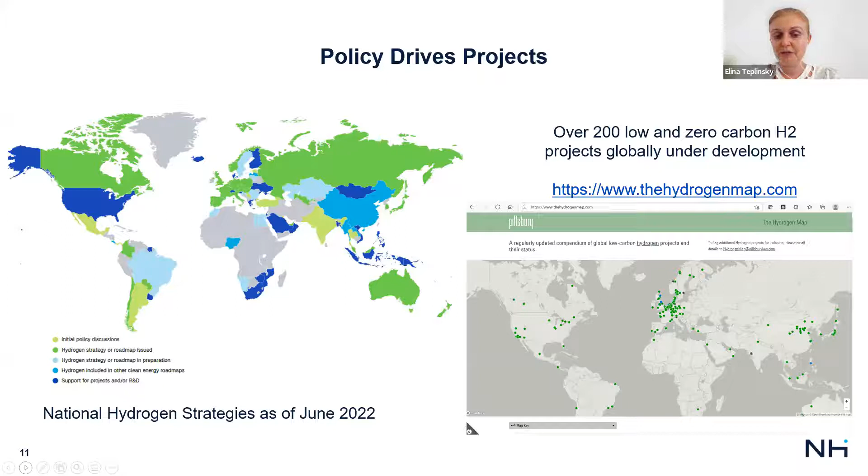From this, we take a look at the jurisdictions that have some form of support, and we take a look at which ones have either explicitly or implicitly included nuclear hydrogen production. It is not all of them, but it is quite a few countries. They have recognized the value of nuclear in producing hydrogen and zero carbon fuels more broadly. And most of these jurisdictions have explicitly included nuclear in their hydrogen strategies. In some of them, you've had nuclear hydrogen production projects and pilots outside of the strategy, despite not having an all-government focused strategy.

And those would be projects in China and Brazil, which both have pilots. In China, there's more focus on advanced reactors, small modular reactors, high temperature hydrogen production. In Brazil, you actually have a project for the production of hydrogen at the Angra nuclear power plant, which is happening today and has happened for quite a long time. But now there's an effort to commercialize that hydrogen.

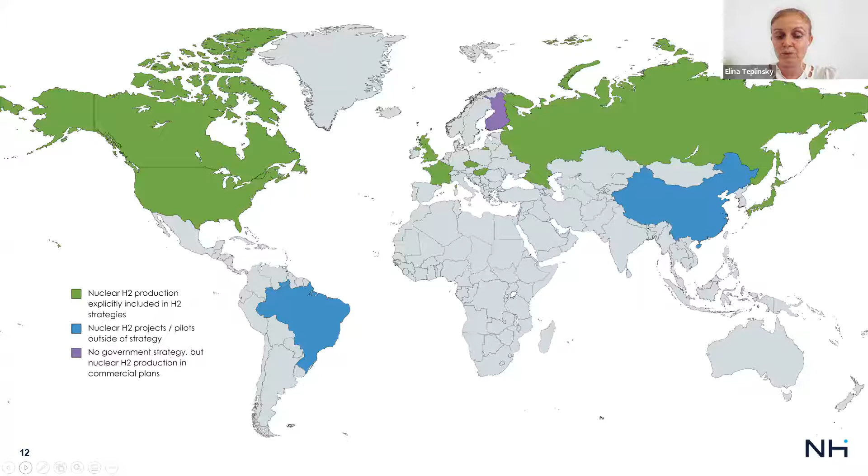And you have an example of Finland, where there is no government strategy, but there is nuclear hydrogen production in commercial plans. But you see that those are the outliers, the ones that don't have a government strategy. Most of these efforts are being driven by some sort of government support. Let's go to the next slide.

So we're going to give some examples of where countries have included nuclear hydrogen production in their overall hydrogen efforts. One good example is the US Infrastructure Investment and Jobs Act, also known as the bill that was passed last year in November. And that is a very big package. $9.5 billion of that 1.2 trillion is dedicated to hydrogen, in 3 different areas, the main one being $8 billion for 4 regional hydrogen hubs.

And the important part here for nuclear hydrogen production is that the bill specifically recognizes that at least one hub must demonstrate hydrogen production from nuclear. And I emphasize the words at least one hub because we're likely to see not just 4, but potentially as many as 8 hubs or even more. And let's go to the next slide.

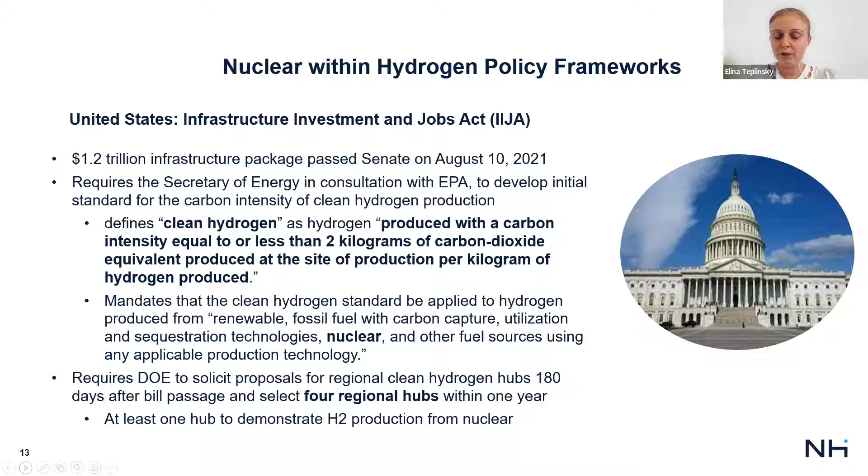As part of the regional hydrogen hubs project, the DOE actually conducted 2 requests for information. And the initial one was really more data gathering on where some of these potential hydrogen hubs may be. And it's worth noting that the way the DOE is looking at this is not necessarily our typical definition of a hub, when people think about an industrial facility or cluster of industrial facilities in a certain city or in a very specific limited geographic area. These are regional hubs that may include as many as 1 or 2 or even 3 states. And really a network of infrastructure within those states on the production, the transportation, and the end use, with the ultimate goal of creating a national, interlinked hydrogen network.

With that, the DOE has, based on the initial responses, looked at 9 different regions and potential hubs in those regions. And if you take a look at the slide and the check marks there, 7 of these regional hydrogen hubs can and probably will include nuclear hydrogen production. So that's where the emphasis on at least one hydrogen hub including nuclear comes from. And the types of nuclear hydrogen production are also potentially diverse here.

So in some of these states, you have a significant number of operating facilities that can produce hydrogen, using their existing capability to produce electricity and or heat. But you also have the potential to produce hydrogen from small modular reactors, for example, like the Utah NuScale project that is taking place now that should be operational by 2030, and maybe some of the other projects that are currently being co-developed by a number of participants with some DOE support. So significant opportunities for nuclear hydrogen production there, recognized and specifically included in the strategy.

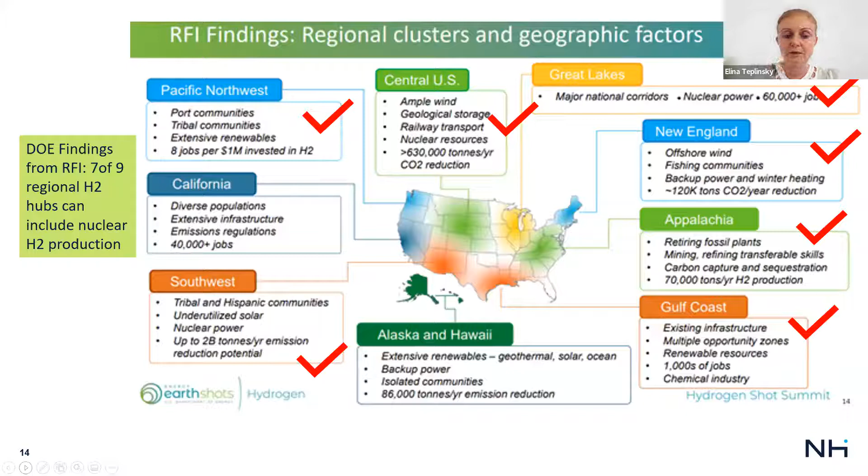The UK is another jurisdiction that has put together quite a comprehensive hydrogen policy framework. They have included both near-term goals to 2025, as well as medium-term goals of producing 5 gigawatts of low-carbon hydrogen by 2030, with the idea to rapidly expand after that. A key part of this is the UK low-carbon hydrogen standard. And that, once again, similar to what we're seeing in the US, is a technology neutral approach focusing on greenhouse gas emissions. And specifically, it includes nuclear, recognizing the low carbon value of nuclear as a hydrogen production pathway.

It also includes 2 important business facilitation vehicles. The first one is the Net Zero Hydrogen Fund, which provides 240 million British pounds up to 2025 to cover the CapEx costs of these new projects. And then in addition to that, similar to what the US government is trying to do with the production tax credit, there is a low carbon hydrogen business model that the UK has put forward, which is similar to the contract for difference mechanism that many of you may be aware of in the UK and other jurisdictions, bridging the gap between the cost of gray hydrogen and the cost of clean hydrogen produced through some of these other sources through this contract for difference mechanism.

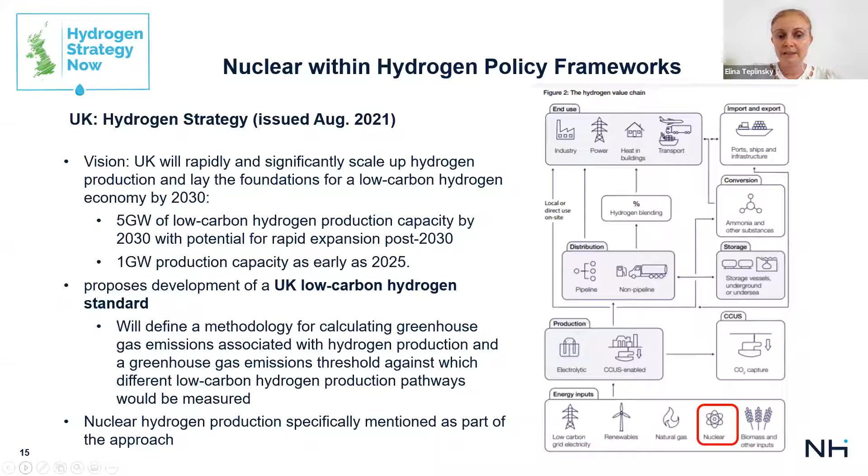Canada also has a hydrogen policy framework that was issued in December 2020. Similar to the US and the UK, they specifically included nuclear hydrogen production in that framework. They have looked at both production from existing reactors as well as production from small modular reactors. And they were looking at some of these new processes, such as high temperature electrolysis, and recognizing the value for nuclear. Unlike the US and the UK, Canada does not have a business model portion of this or financial aspect, but that may be something that's developed at a later time. Let's go to the next slide.

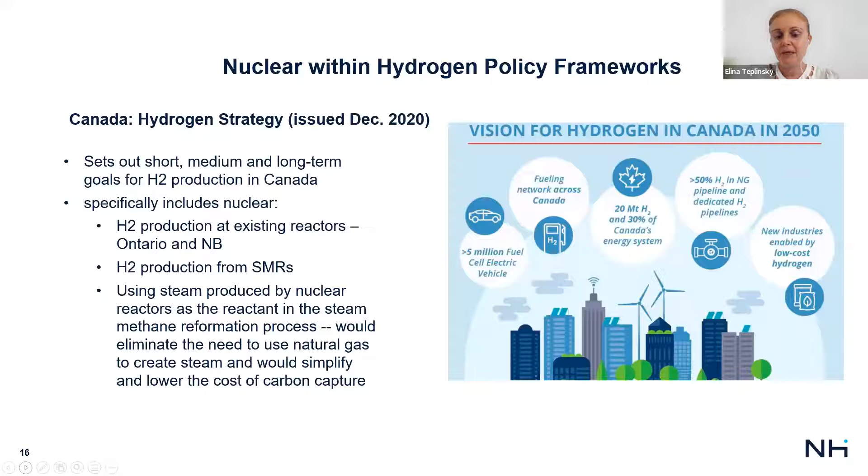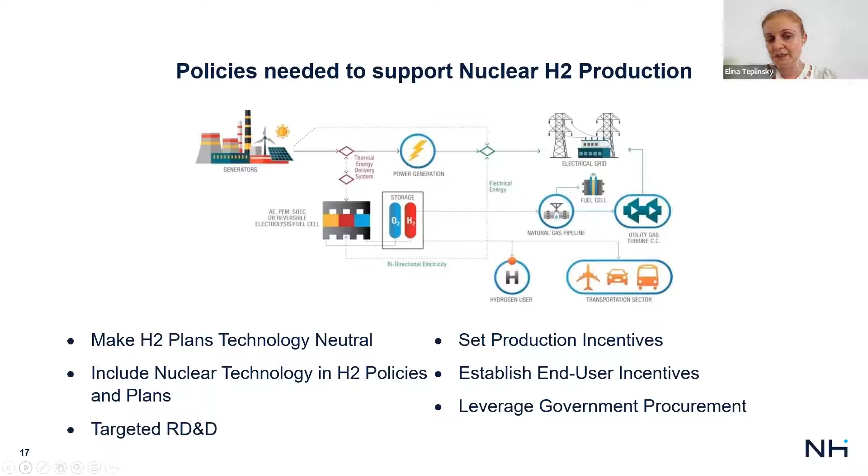So these are examples of 3 jurisdictions, but there are quite a few others that are developing or have already developed hydrogen roadmaps. And we think there needs to be more specific incentives and mechanisms in these roadmaps to ensure that the hydrogen market can effectively scale up and also ensure that nuclear can contribute to that. To that end, in the white paper, we have set out a number of incentives and mechanisms that we think will work across various jurisdictions. If we go to the next slide, I'll try to quickly summarize them. For those of you who want to read more, please take a look at the white paper on the website. And also let us know if you have any ideas, because this is intended to be a living document, and we welcome other thoughts and other proposals.

So as a baseline, we'd like to see hydrogen plans and roadmaps and strategies to be technology neutral. We'd like to see an emphasis on greenhouse gas emissions rather than a specific focus on any one technology, because we think that the color scheme is not helpful. It potentially disincentivizes production processes that can in fact be crucial to making this market a reality. With respect to the policies and plans that have specific technologies listed, we do think nuclear needs to be expressly included as a zero carbon hydrogen pathway, and where you have very specific goals and metrics for hydrogen production, we think we should have those for nuclear as well.

So we see in some of these roadmaps, for example, X number of kilograms of hydrogen produced through, let's say, solar and wind. We'd like to see something very similar for nuclear as well. And to the extent that governments are focusing on hubs, those hubs should also include nuclear production facilities, both existing ones, as well as potential new technologies.

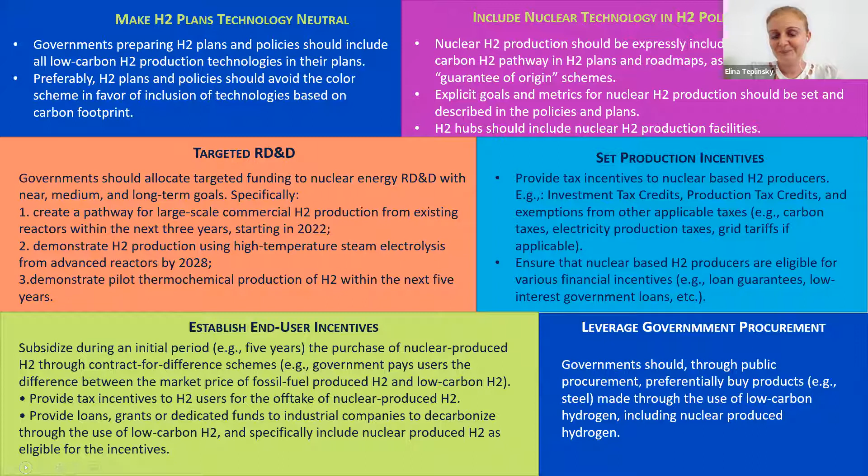Thanks very much for this. Thanks, Elina. Very comprehensive, and Carlos, really amazing progress you guys have made with the initiative. So I think we're kind of running over, but I think we have time for one question.

And I think if you guys want to both quickly answer about the kind of challenges that you see in scaling nuclear hydrogen production, and maybe some of how you're thinking we can address those challenges. But we have to be kind of quick, so maybe 1 minute answer each or something like that. Absolutely. Maybe I'll start and then turn it over to Carlos.

We think just like any industry, the nuclear industry sometimes is waiting for certain incentives to be developed before it jumps in. So with today's industry, a lot of that is electric utilities, right? And these electric utilities have set business models. So developing new business models can be a challenge for some of them.

And we think specifically that's why some of these incentives are really needed, to demonstrate that there is government interest in supporting these projects. I think that's one key challenge that needs to be overcome. And I'll turn it over to Carlos for others.

Just to round up, from a technical standpoint, I think we've seen a lot of demonstration projects already ongoing, as we mentioned, and I think we need to accelerate those to prove to the market that this solution is viable and it works, and it's all that we say it is. So to the extent that we can accelerate these demonstration projects across the world, I think that will help scale up as well.

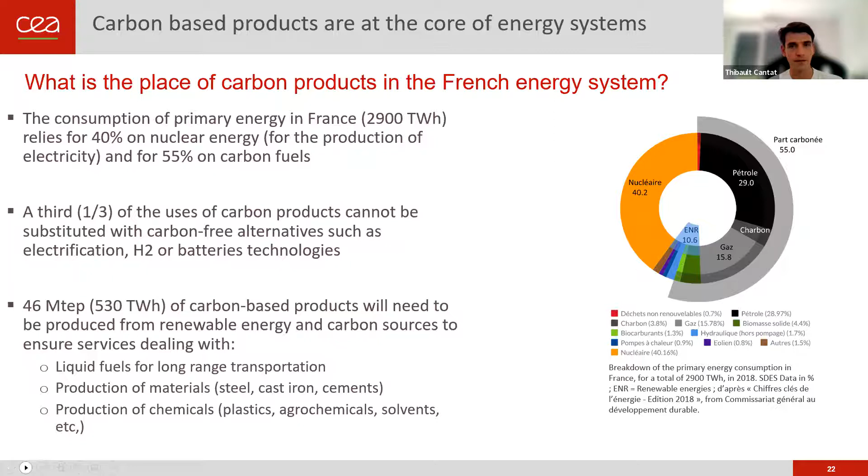So the reason why we are utilizing so many carbon products, of course, is because the chemical energy stored in those carbon-carbon and carbon-hydrogen bonds is extremely dense, and this is why we use a lot of liquid but also gaseous fuels. And overall, in the world, about 85% of the world energy portfolio comes from fossil resources. Again, oil, coal, and natural gas, which we refine into fuels, and the side products go into petrochemistry. Next slide, please.

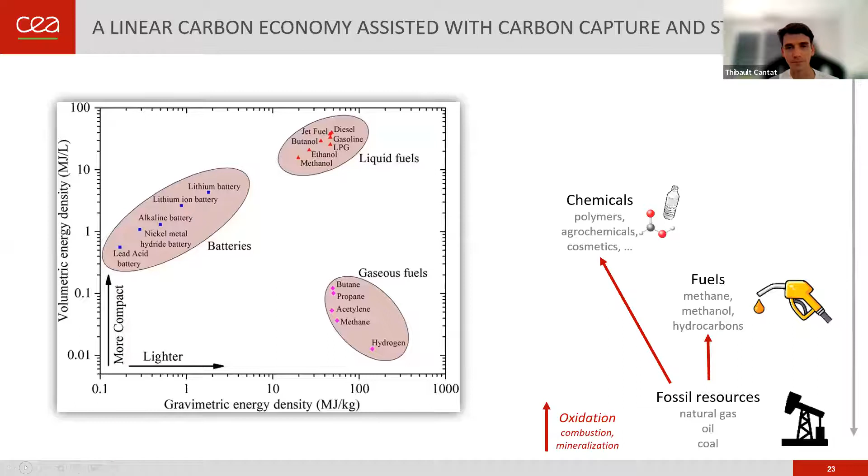Of course, at the end, all the carbon atoms are mineralized, meaning that they are oxidized and they accumulate in the form of carbon dioxide in the atmosphere. So coming from there, of course, we could capture and store carbon dioxide, and that's what we call CCS, carbon capture and storage. So although we believe this could be a potential solution to cut CO2 emissions in the atmosphere, we don't develop CCS technologies at CEA, simply because this will still foster a linear carbon economy where we will exhaust at some point either the fossil resources or the capabilities for the storage of carbon dioxide.

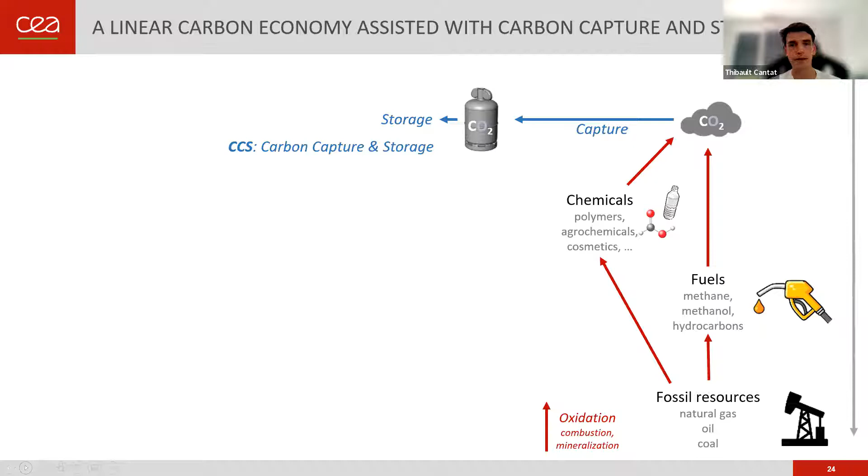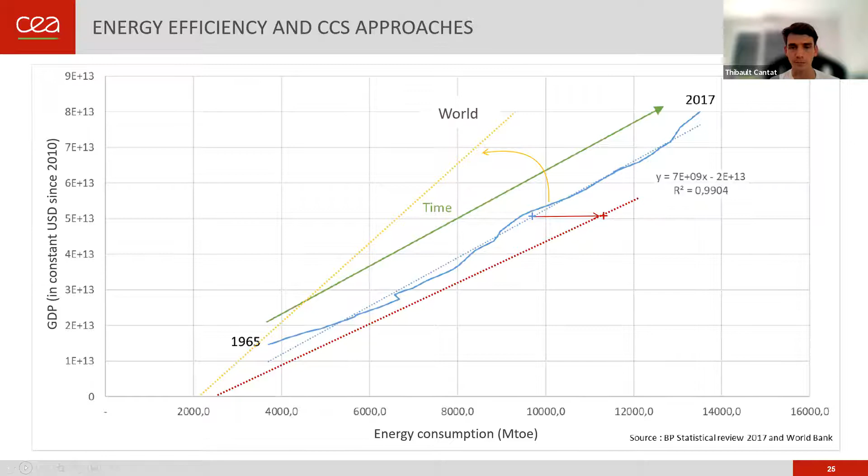So what can we do instead of just doing CCS technologies? Well, the legislation is trying to push us towards a more sustainable and more circular carbon economy. And in particular, in Europe, last year a new regulation package was published, which is called the Fit for 55. And within this package, there are new targets which are set especially for aviation and for maritime transport.

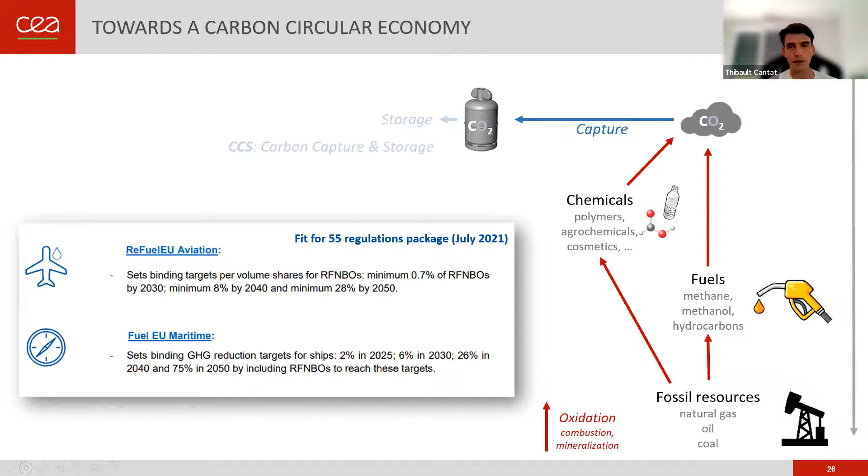If you look at aviation, for instance, the package sets binding targets per volume shares for renewable fuels of non-biological origin, meaning that we need to produce by 2050 about 28% of the fuels which are used in aviation for traveling inside Europe. About 28% of these fuels should come from CO2 capture and recycling using low carbon energy sources. Next slide, please.

Although sunlight may be the most abundant and the cheapest one in the long run, this is a tremendous change of paradigm compared to what we're actually doing today, where we extract chemical energy from the soil. So in the short term, what we see is that first, sunlight will be converted to electricity through wind technologies and photovoltaics, and electricity utilized for the electrolysis of water promotes the formation of green hydrogen that can be used to convert CO2 into chemicals and fuels. So those are the hydrogenation pathways.

In the longer run, electrolysis is of course a good opportunity to convert electricity and store the energy into chemical bonds. And of course, nuclear energy is a good opportunity to valorize low carbon electricity and store it into chemical energy. In the longer run, the direct conversion of sunlight into chemical energy is a possibility. And this is also something that happens naturally, because biology through photosynthesis is already capturing CO2 directly from the atmosphere and photons directly from sunlight to grow biomass.

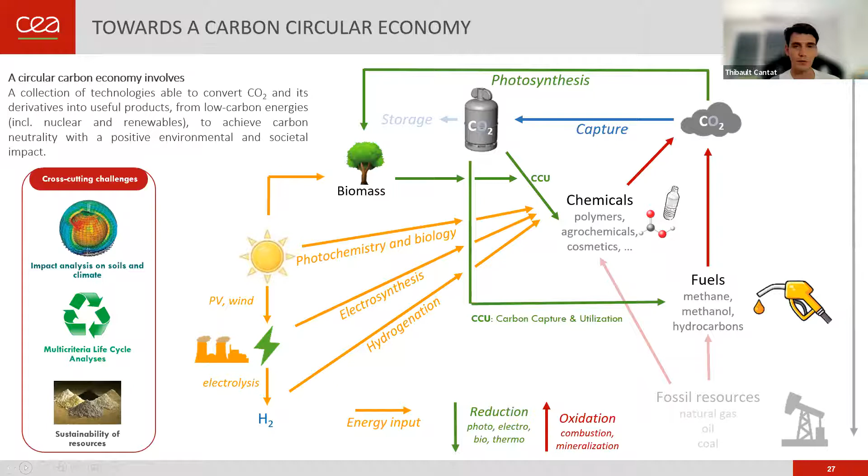This is why we have cross-cutting challenges, looking at the impact analysis on soils and climate, doing LCA analysis to make sure that we don't create new problems, not on carbon, but on different elements, etc. Next slide, please.

So the way we see the value chain for this carbon circular economy comes first from the collection of the resources, because we need low carbon energy sources such as electricity, but also hydroelectricity, solar, wind electricity, or nuclear electricity, plus, of course, the carbon source, which can be CO2, but also derivatives such as biomass, waste plastics, solid waste coming from cities, etc.

The idea at the end is to convert those resources into key molecules. Those could be gases, liquids, and solids for the main two sectors that we identified, which are the energy sector and chemistry, those two sectors which are really difficult to decarbonize. And the key element in this value chain is, of course, the way you produce, the way you transform the energy sources and the carbon sources.

So we have organized our program along 3 lines. The first one is about thermocatalysis and thermoconversion, where CO2 or biomass are converted with dihydrogen as a source of chemical energy. Electrocatalysis and photoelectrocatalysis is a research and development program aiming at the conversion of CO2 together with water in the presence of electricity or directly sunlight, for instance, to produce solar fuels.

And finally, because we have expertise in biology, we also have a research line dealing with the conversion of CO2, water, but also biomass directly using sunlight into those useful gases and liquids for the energy sector. Next slide, please.

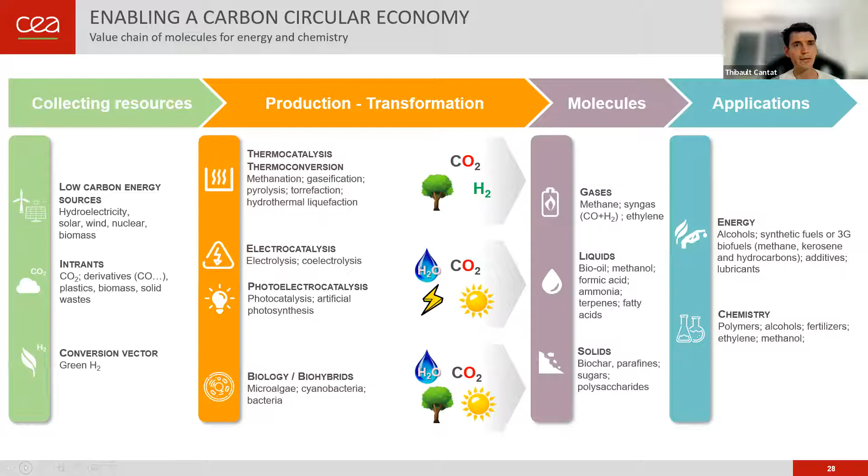So just to give you a quick overview of what we're doing in terms of the different research projects and the different strategies and challenges we have identified along those 3 research lines. Here's an example of what we're doing on thermocatalysis and thermoconversion. For instance, to convert CO2 in presence of hydrogen to methane. This is a highly exothermic reaction, so we need reactors which are able to deal with the increase of temperature along the conversion of carbon dioxide in the presence of hydrogen.

So we have a research program dealing with the formation of methanation units and reactors which are dedicated to CO2 conversion. We also look at the conversion of biomass using different kinds of technologies. Here's an example of a fluidized bed converter for the conversion of biomass, but also solid waste.

And so we have different strategies aiming at the development of conversion paths going from CO2 and biomass to fuels and chemicals. We explore the conversion of CO2 from the design of new catalysts to the development of reactors and processes. And of course, we develop new reactor architectures to shorten the value chain of CO2 conversion, trying to convert directly CO2 and hydrogen to useful chemicals and fuels.

Of course, the challenges are the challenges which have been identified, I think, by the whole community, especially a difficult economic balance because of the competition with fossils. And we need, of course, green hydrogen to be able to utilize those technologies. And this really questions how the carbon value chain will compete with the hydrogen value chain or how they will complement each other. Next slide, please.

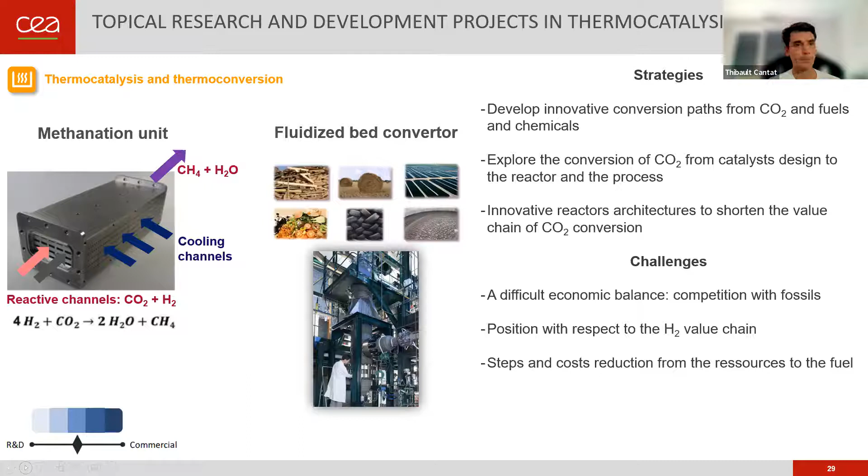And the biomass can be carbohydrates, but also different kinds of oils, which can then be refined and used as drop-in fuels in the industry. Next slide, please.

The photoelectrocatalysis path is super challenging because what we do is mimic photosynthesis by using new kinds of materials which are able to capture sunlight, convert photons into electrons, and then the electrons are stored in the form of chemical energy by reduction of carbon dioxide.

So here we are really at a much lower TRL, designing the different cells, working on the performance and the robustness of the materials in order to target the production of specific chemicals and fuels. Next slide, please.

Or we can drop this slide and go to the next one if I'm running out of time. Okay, so here comes really what we're trying to do since a year. It's really to start and see how nuclear energy production can provide electricity, but also heat for the production of sustainable fuels. So we have two research lines looking at very specific case studies for low carbon industrial complexes, which we want to decarbonize, especially complexes where we have chemical industry, so an activity that is very difficult to decarbonize.

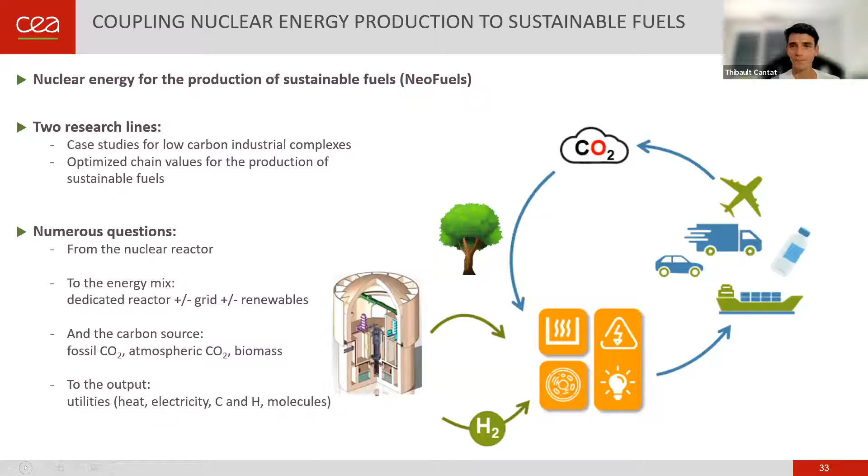Thibault, thank you very much. Yeah, I think this couple of things you raised are really worth pointing out again. And one of them, I think, and this comes from our work as well, is that co-production of valuable products turns out to be a very attractive business model. And this is something that when you look at the traditional chemical industry, they do all the time. Exactly. Yeah. And so I think one way that your work points for us is to go beyond just the kind of simplistic, like one reactor makes one product and sells to one customer, but beginning to think in this more integrated way.

So with that in mind, do you have a sense of which sectors in France are going to be the kind of early adopters for this kind of circular carbon synthetic fuels that you're talking about? Yeah, that's a really good question. So because our electricity is already mostly decarbonized, thanks to nuclear electricity, the question for us is not so much of trying to decarbonize further the electricity, but we need to start and tackle right away the decarbonization of much more difficult to decarbonize sectors.

And in particular, for the production of sustainable fuels, what we see is really the aviation is a really good driver. And at the same time, it's also questioning us about, is it the best strategy? Because we know that we're going to have to decarbonize the aviation, but also the maritime transport at some point. But in the short run, we all know that we're going to need a lot of low carbon electricity. And we need to look at what is the best use of that low carbon electricity. Is it to decarbonize the most difficult sectors, or should we have a more practical approach in the shortest run and try to decarbonize, for instance, the steel industry, which is a bit easier to decarbonize, but this one does not necessarily need carbon-based and sustainable fuels?

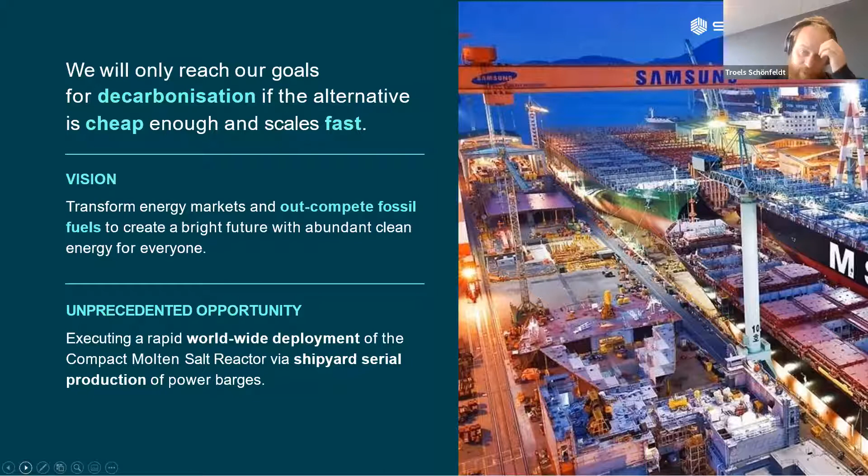So before going into what we do, I want to just handle who we are. So as I said, no public funding in Europe. So we are a privately held and privately funded company. That's actually a pretty strong point for us, because it means that we have learned to think very commercially from day one, and we cannot just depend on subsidies or government grants. We have to go and find a business case that is sustainable. No government help there. So that's a really strong point.

By now we are, I think, actually 120 people, and we are still scaling to 150 within this current funding round. We are people from, I believe now, 27 countries. We grow very fast these days. It's actually really amazing to be part of. I can tell you that 1.5 years ago we were 22 people. So being 120 is quite far from that.

We have our headquarters and labs here in Copenhagen. We have built state-of-the-art labs, a few hundred square meters, I think 400 square meters now. We have 1,200 going into construction these days, so quite big labs. Then we have business offices in South Korea and Singapore.

And just to attach a comment to that, I think in this meeting we are talking about what can Europe do, and when we say Europe, we mean France, because they are pro-nuclear, and maybe UK. When we say the Western world, we also include US. I think this meeting is very much revolving around US and what can they do. But if you are in US, France, or UK, you will be absolutely locked down by export control. So it's very hard for these products to go to the developing world.

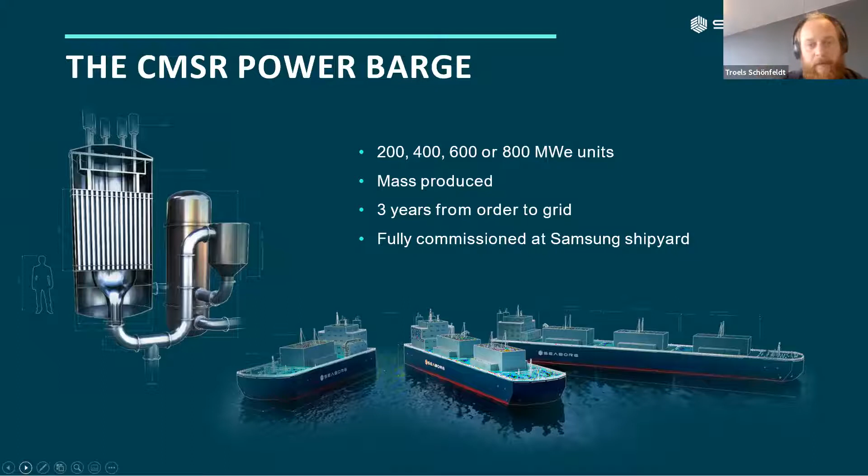Okay, yeah. So what we're doing is actually a molten salt reactor, and to explain it a little bit in layman terms, I brought a couple of pieces of fluoride salt here. I don't know if you can see the camera, but here's a couple of pieces, and these are found on the beach in Denmark actually. Quite beautiful rocks. You can buy them in crystal shops because they're also good for your spirituality. But we use them for nuclear power.

The magic behind the fluoride salts is that we can take this salt, we can dissolve the nuclear fuel into it, we can melt it. It melts around 500 degrees centigrade. Then we can pump it into a nuclear core and generate a lot of energy. And when you create that energy in the nuclear process, you have these fission products coming out. Those are the dangerous radioactive elements.

In conventional nuclear reactors, these are contained as gases, kind of like in a brick of an oxide lattice. But if that brick is opened up in an accident, then these gases come out, and highly radioactive gases are quite dangerous and quite hard to handle when they get out. So that's actually the cost driver of nuclear, that you have to contain this gas no matter what happens. But in a fluoride salt reactor, the fluorides react with these fission products to form new fluoride salts.

And as I said before, the fluoride salts simply behave like a rock in nature. So in case of extreme accidents, having a gas cloud coming out versus having a liquid rock that solidifies coming out is very, very different. Both are radioactive, but in one case, your measure is to not breathe, and in the other case, your measure is to clean up. And that's just a way more handleable scenario for accidents, meaning that we can make a much simpler design, which saves us money and makes this a very cheap technology. So that's the magic behind fluorides. But fluorides are not easy to handle, so we have built all these state-of-the-art labs to do it. Next slide, please.

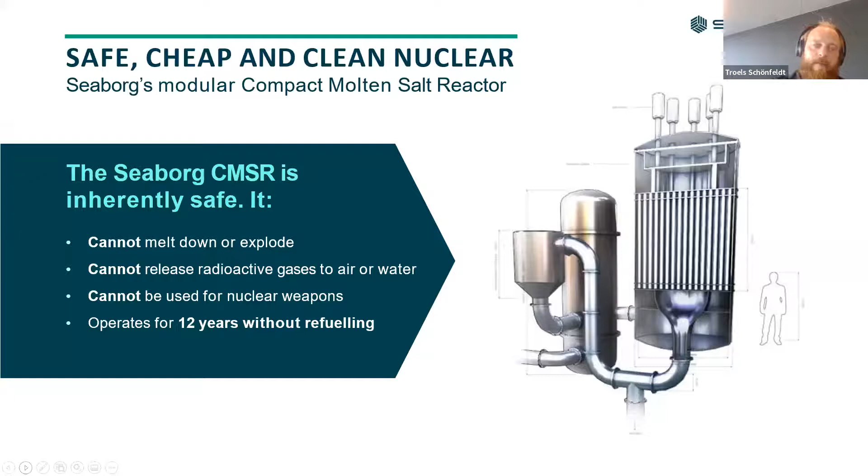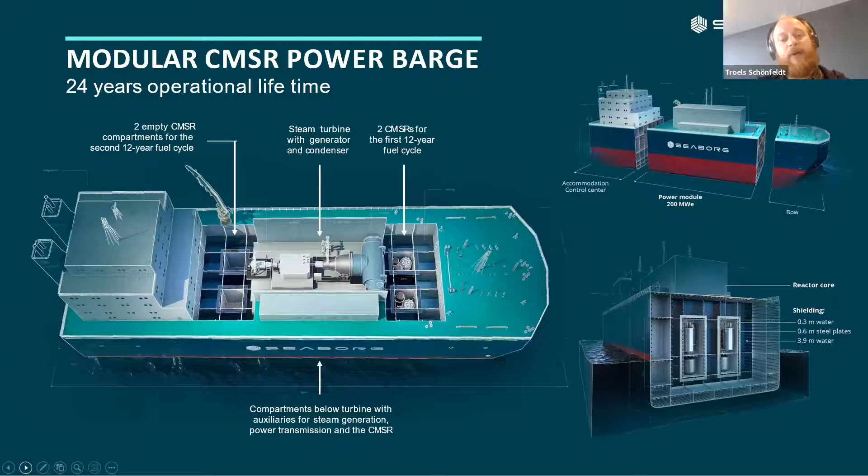So here you see an illustration of the barge. We plan to have 2 reactor modules installed on the barge here in front. They supply high temperature steam. This is a high temperature reactor, so you get high quality steam out. It goes to a turbine. That turbine generates electricity. The reactors operate for 12 years, and then we install 2 new reactors and operate for an additional 12 years. It's as simple as that. And then, let's just go to the next slide.

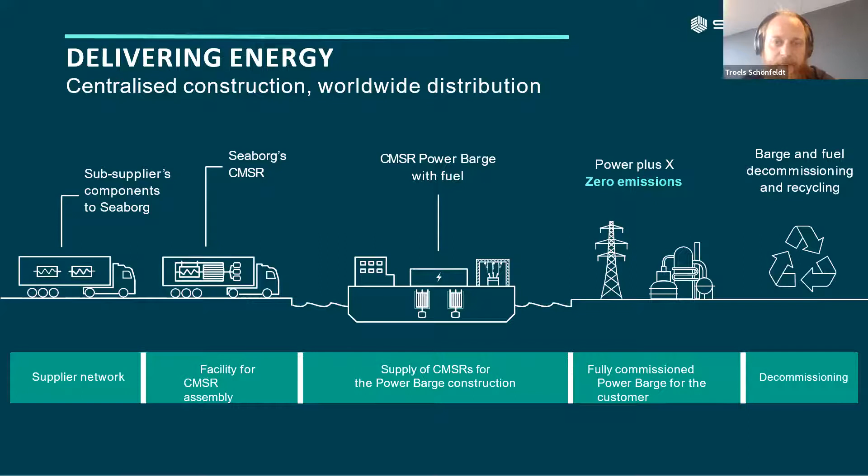Next slide, please. Next slide. Yes, please. So okay, something is wrong here.

But anyway, we are saying global licensing approach, and I said you cannot build nuclear reactors in developing countries. I will say that's because in developing countries, who trusts a regulator? So the way we solve that is by using a maritime framework where you take the same rules and regulations as you would onshore. It's the exact same authorities and the same rule books, but you are regulating it internationally.

So if a developing country wants this, a developed country can come in and say, we actually ensure that this lives up to the standards, and we put our flag on it, and we do the inspections to ensure this. That's an enabler for these developing countries to get into nuclear today. And in July 2020, we were the first to get a commercial approval of any kind of advanced reactor, which I'm quite proud of. Then go to the next slide, please.

Also kind of magically, and unfortunately, this wouldn't cover the planned expansion of coal and gas in Southeast Asia. So this is existing projects we can replace with this. And amazingly, 200 power barges a year would correspond to roughly 5 times the global wind production to date, in 1 year. So we can reach these insane scales, but even with those, we're not going to win the climate fight alone. So we need a lot more. Thank you.

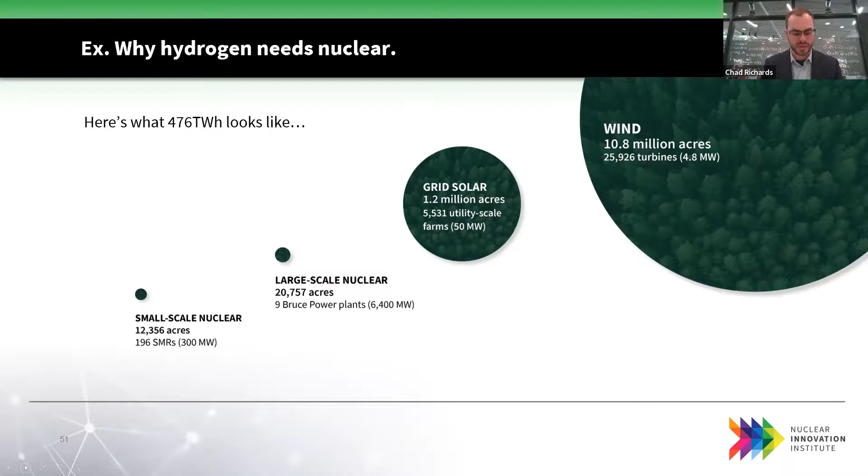And when you look at the sheer number of acres that these projects would take up, it really makes that case again that nuclear has an absolutely foundational role to play in producing hydrogen. And this visual kind of presents it in black and white in that regard.

Next slide, please. So the focus of my presentation today will be more on the policy side rather than the technology side. I think we've had with Thibaut and Charles some really good overviews of technologies. Really in Canada, we have a very robust policy framework, as Alina mentioned off the top of the webinar, that is really enabling and laying the groundwork for a really productive and thoughtful hydrogen economy as we move forward.

And two of those foundational pieces are the Hydrogen Strategy for Canada, which was launched in December of 2020, and Ontario's low carbon hydrogen strategy, Ontario being the province that we operate in here in Canada, outlining a bit of a path forward for the province. And we'll get into how some of these strategies really see nuclear as a critical piece to enabling hydrogen production here in Canada. Next slide, please.

So the federal government's hydrogen strategy: the government of Canada really took the initiative to develop a pretty robust strategy. It's a rather lengthy document, and it's a bit of a living process. It's not one policy paper that got published and then we're calling it a day. It really established a framework for how we're going to work on these issues and advance this strategy together with industry, NGOs, academia, and provincial levels of government, how all of these partners can come together and work within one framework to advance this hydrogen economy together.

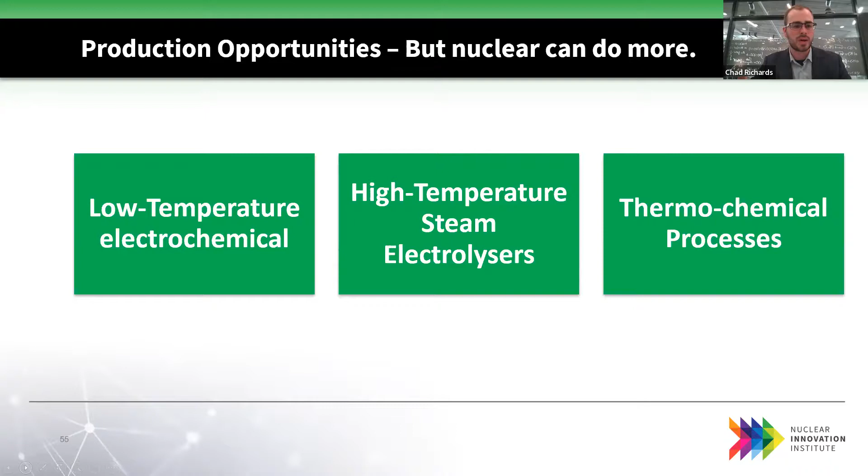And the first step has been creating an inventory of what opportunities we have as a country presently. This hydrogen strategy framework, with that mix of industry, NGOs, academics, and governments all at the table, provides a really good opportunity to get a sense of what's out there. As the lead for the Production Opportunities Task Force, it's been really exciting to see all these opportunities come in and see what individual industry partners are exploring and what they may be ready to do. We've compiled that into an exhaustive list of opportunities, and we are now shortlisting which are most likely to succeed and compete in this hydrogen economy.

What are the opportunities that have the most likelihood of success, and really advancing those so that other task force groups can look at some of those unique challenges around economics or regulatory challenges or specific technology challenges as well. It's been really refreshing to see all this come together.

What we've done as a task force is bucket these opportunities into near, medium, and long-term opportunities. So near-term opportunities being those that could be producing hydrogen before the year 2030, medium-term being those that could be producing hydrogen before 2035, and the longer term looking at kind of 2040 outward. And obviously there's some inherent characteristics that come with both of those.